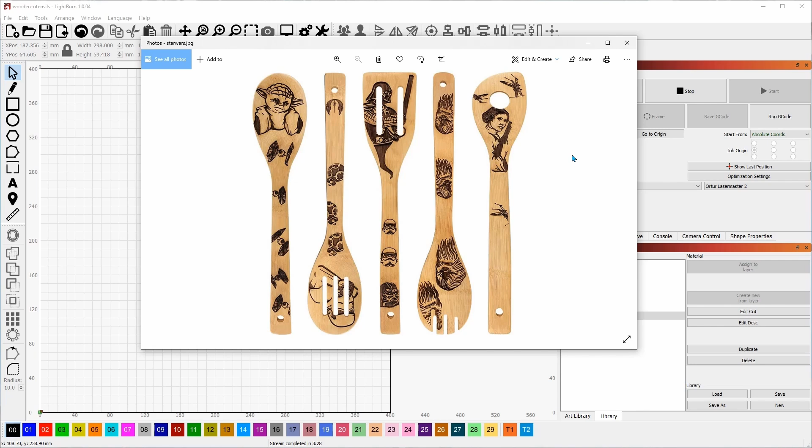So today I'm going to show you how to frame this out so you can get everything perfect, because on my first couple I didn't get it perfect. But this time I'm going to make it perfect, and the end product is going to go out to one of my Patreon supporters, Stuart, and I am making this for his daughter, Tara. So let's get started.

I did some basic measurements of the spoon and the other utensils, and it's 298 millimeters from one end to the other. So I'm going to start with this rectangle, put it onto a tool path, unlock it, and make sure you're in millimeters. So I'm going to put the width at 298.

I know the height is between 20 and 25 — it's 20 up here where it gets a little narrower, and 25 back here. So I'm going to choose a happy medium and put it at 22. And there we go, that's our workpiece right there.

Now, to make this into a spoon, we also need to add the spoon end. I measured the spoon end, the oval part, and it's 100 by 60. So I'm just going to bring out an oval, drag it out in any shape, doesn't matter. It's 100, I press tab, by 60, press enter, and there's our spoon part.

The entire spoon part is engravable, but I'd rather engrave on the inside part. So I took a measurement of where it dips down, and I came up with 80 by 50. I'm going to select this one, press Control+D to duplicate it, and change it to 80, press tab, and 50, press enter.

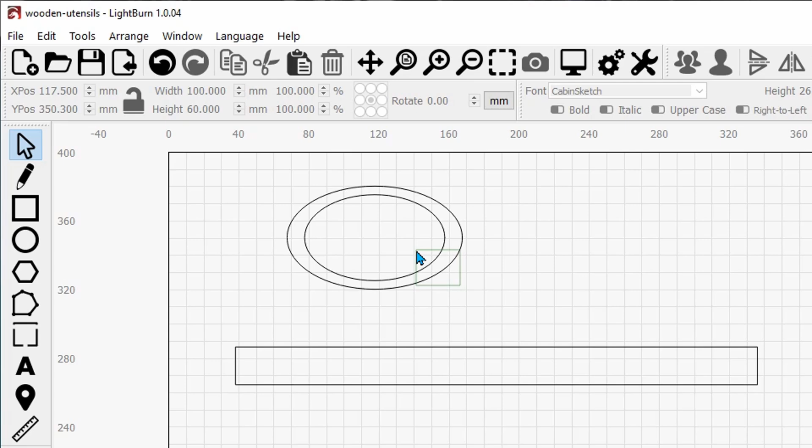Now I have my two ovals, and I'm going to drag from the bottom right so that I have a green drag — see the green color? That selects both of them. If I drag from the top left, it doesn't select anything unless the whole thing is encompassed — you see it'll only select that one. So you have to cover everything to select it. Dragging from the bottom right, or actually anywhere from the right, will select both of them.

So now I've got these two selected, and I'm going to drag this over here. I'm going to zoom in. I'm moving my work plane by pressing down on the center mouse button and dragging, or you can come up to the top and click the drag button and then click with your left mouse. To zoom in, I'm rolling in on my roller wheel.

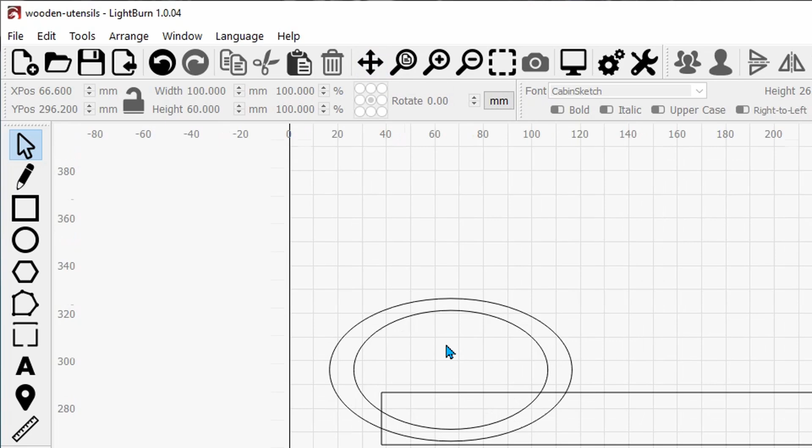Now I'm going to select this again, and I'm going to bring this down and get it right to where the edges are, just like that. Now you see it's almost touching both edges, so I want to have it right at the edge of both, and that's close enough. So now we've got what looks like almost our spoon here.

At this point, I'm going to click on the outer circle, hold down shift, click on the rectangle, and weld those two together — this is the weld button right here. Sorry, I went quick, let me back that up and show you again. I click on the outer circle, click on the rectangle, and come over here to weld. And there we have something that's looking like our spoon.

Now there's a spot I want to mark on here, which is the little circle cutout for the hanger. I know that little circle cutout is exactly 7 millimeters.

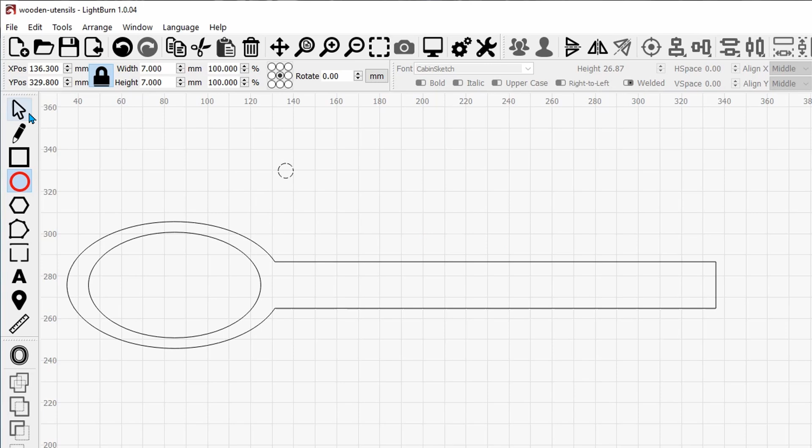So I measured that, and now I'm going to come over to the circle tool, click on it, press shift, and draw out a perfect circle. Come up to the lock button, lock it, and set it at 7 millimeters. That's exactly the size of the little cutout over here. Now I'll bring that down and set it in place.

I'll zoom in so that I can see it really well, and align these horizontal centers. Now I know it's perfectly centered.

I also took a measurement from the edge to the center of the hole, and that turned out to be 18 millimeters. So now I'm going to take the line tool, click once. Now I have my line, and that's 10, 15, that's about 18 right there. I'll click there, then right click to get rid of it.

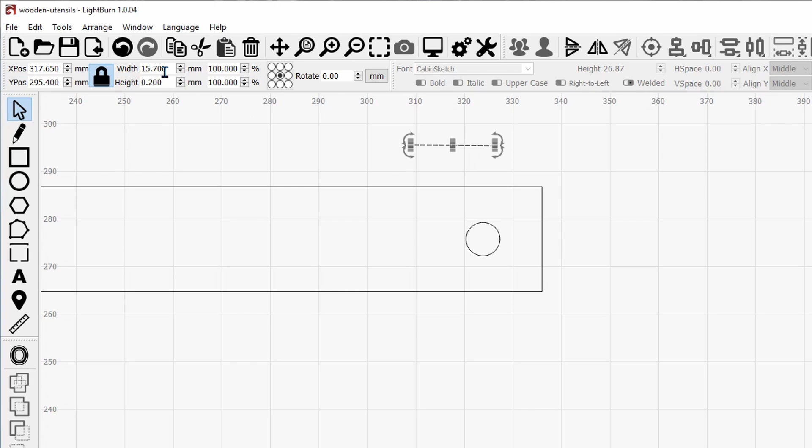Come back to the selector tool, select it, or you could press the escape key. I know that I need to be at 18 millimeters, so I'll click in here on the width and change that to 18, and that's exactly how far from the edge it is.

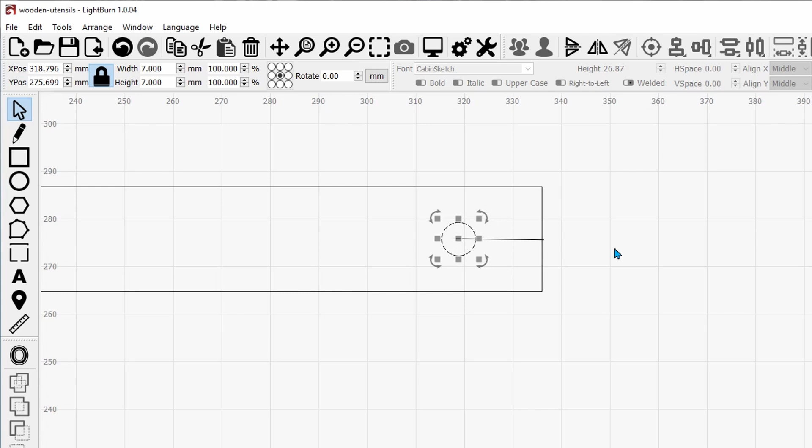With it selected, I'm going to bring it right here, and I know now that the little dot in the middle is the exact center. So I'm going to hold control and use my left arrow, just moving it ever so slightly until I have it directly centered with this line.

Now I can select the line and delete it because I don't need that anymore. And there we go, we have our tool.

Now I guess you guys can figure all this out from here on out, you know, dropping a couple graphics in, but I'm going to show you a couple little tricks. So we're just going to drag and select everything, and drop that onto a tool path down here on the bottom right, T1 or T2, whichever one you like.

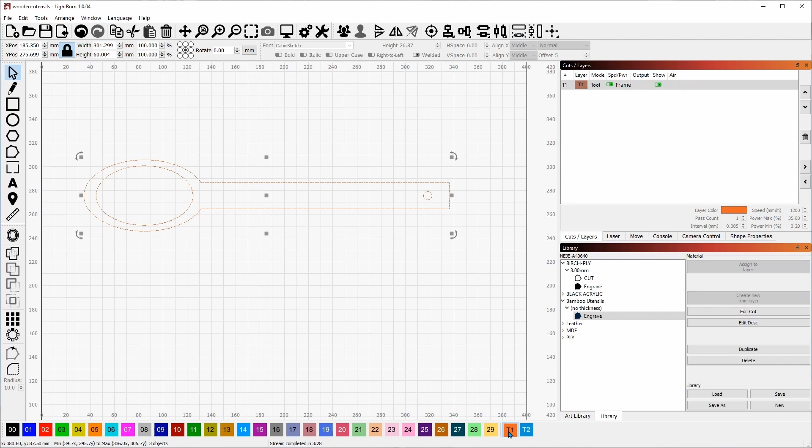Now that we have that on a tool path, we know that our rectangle is 298. So I'm going to draw another rectangle, and I'm going to unlock this up here, and I'm just going to make this one about 100. We know that the height, we said 22 was going to be the average. So that's, there we go.

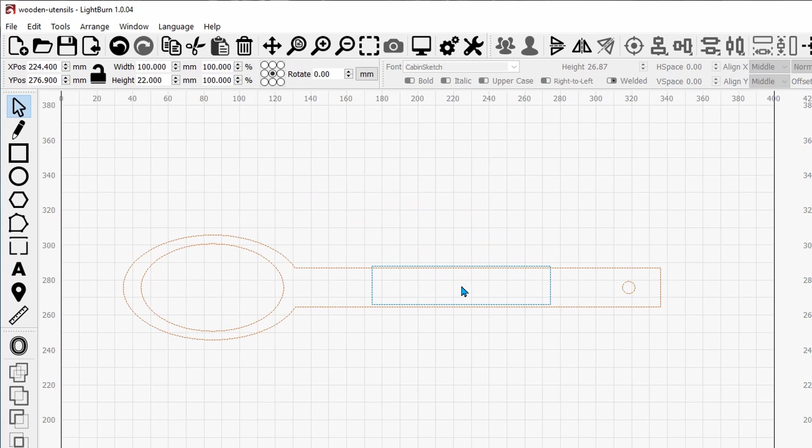Now I'm going to use this one, I'm going to put it on the T2 path just so it's a different color. I'm going to use this one to align all of my artwork. I know I don't want to go more than about halfway out because it starts getting narrower and narrower.

It comes all the way down to 20 millimeters, so it goes from 20 here to 25 there. And this is about the right spot where I need to be.

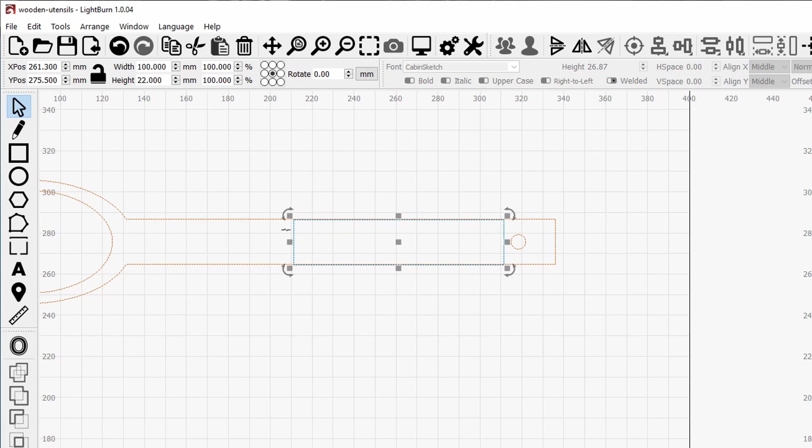Now you don't need to make a rectangle, you can just draw a line right here, same thing, but I like to have that as my working area. Just to make sure it's aligned perfectly, I'll get it right where I think is the right spot, which right there is pretty good. That's close enough, so we've got our spoon and we're ready to go.

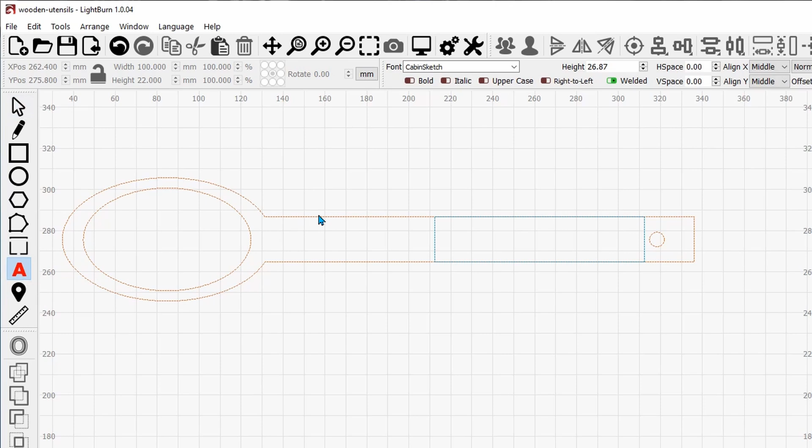Now the next thing I need to do is put in a name. I'm going to come over to the text tool, click on that, and type, actually capital, like so. I have this in Cabin Sketch.

I happen to like this font on Bamboo because it comes out looking really superb. So I'm going to put 'Tara' and let that snap in somewhere here, right there.

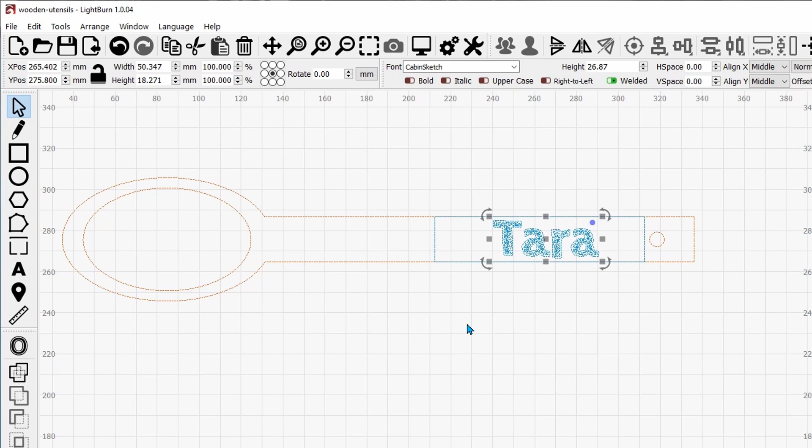Once it snaps into the middle, I'm just going to slowly move it by pressing control and the arrow key to where I want it, which is closer to that little cutout right there. And that's perfect.

Now the next thing I'm going to do is come to my art library, and I'll have links to all these files if you want to download them for free, and you can make your own using either my template—I'll put a link to the entire template—or just the art libraries. The art libraries are all available on my forums.

So what I'm going to do now is zoom out a little bit, bring in the cats, 3 cats. He said that she likes cats.

I'm going to come up to the top and ungroup these, and then I'm only going to select this one cat right here, and drag him up. I didn't get them all, see that? So I'm just going to hold down shift and grab that extra piece right there, move him out of the way, and just get rid of these 2 guys.

Now I'm going to drag over this and group it back together again. I'm going to rotate it by coming up here to rotate 90 degrees, and then I'm going to scale it down. I want the height to be around 19, but I'll say 18 millimeters to be safe. And I forgot to lock it first. Look at that - we have to lock it and then do the 18 millimeters. I do all this stuff live, so you get to see the mistakes. Now we're going to take this and drop it right there, and it snapped right into the middle. Keep in mind, this is a tool path, so it's not going to burn at all.

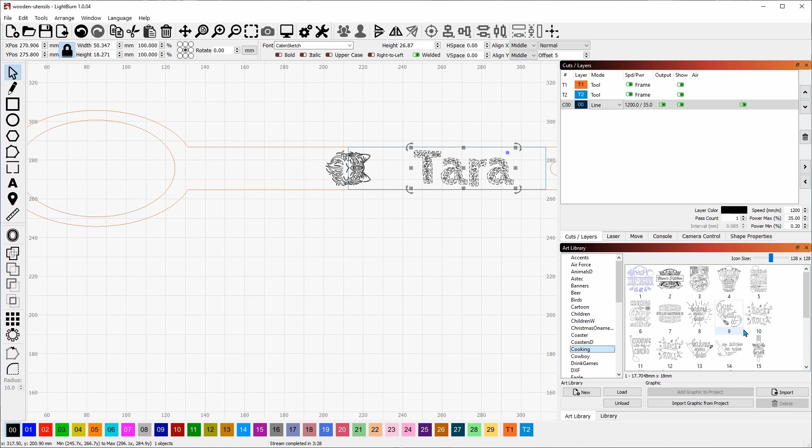So now we've got our cat, we've got our Tara. The Tara we're going to put on the black layer, the cat is already on the black layer. I'm going to bring out one more graphic, coming down here in my art library to cooking, and I think I'll bring out Top Chef. It goes on the black layer down on the bottom left. Scale it up just a bit, and we're going to rotate this also 90 degrees so that it all matches. I'm going to drag this over, let it snap into the middle. Now this inside part is where it gets lower, so I'm going to scale it to that entire size of the inside piece.

Now what I'm going to do is put this black layer on offset fill. I could put it on regular fill - if I do that and come up to the preview, you'll see we have 21 minutes and 59 seconds. If I change it to offset fill, the time gets chopped more than in half. Not only that, but the offset fill goes around in a circle, so the time is less because you lose all the white space scanning. It also does a really nice job - there's not so much movement, in fact there's no movement of the gantry because it's just going in a complete circle on all three graphics. So we've cut our time probably by about 60%, it looks like.

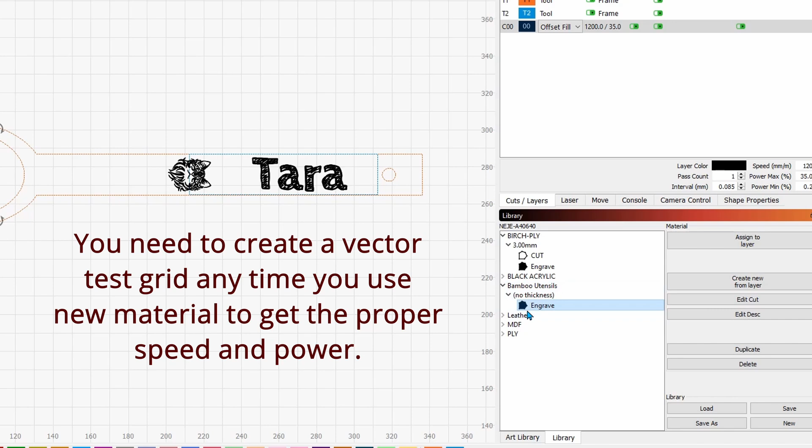Now, one thing you do need to do is some testing on your laser to find out what speed and power you can burn bamboo at. I'm not worried about that because I have bamboo in my cut library - I've already done my tests. This is my engrave right here. All I have to do is assign it to that layer. It's exactly the same as what I just did because I already knew what the settings were. So there we have it, that's the first one.

So now comes the trick. The black layer we're going to turn off, and now that we have this all set, this blue tool path here is the one we want to frame with. So what I'm going to do is stretch this blue tool path out right up to the edge here, and then on this side, stretch it to the edge here.

And I'm going to turn off the framing for the orange one. Now the only thing that's going to frame - and actually we don't even need to show that at this point, I'll just turn it off for a second - the only thing we need to frame, the most important key part, is going to be from here to here, around like this. This is going to be our key framing spot right here.

And I think this is where a lot of people mess up - they try to frame the entire workpiece and it doesn't work out well. So if we just frame this spot right here, it'll frame all the way around to here, and then I'll know where the edge is on this side to have the edge of the spoon. Then it'll come all the way back, and I can make sure from here to here to here that it's perfectly lined up, and we'll have a perfect frame. That's a neat little trick for framing this odd shape.

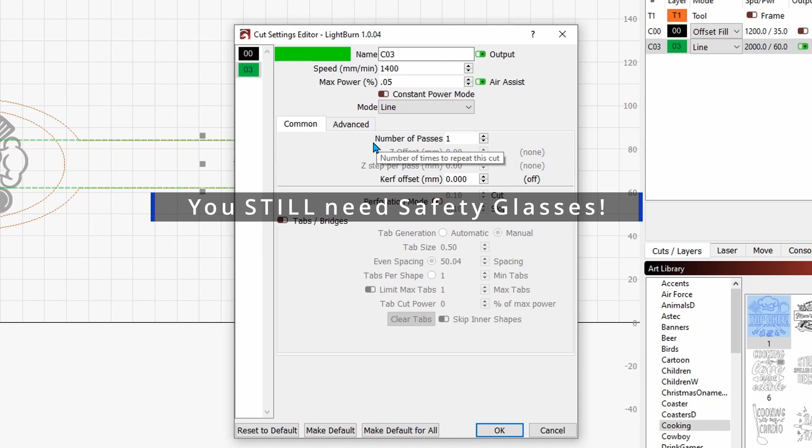And here's the trick: set the power to 0.05. That way it just turns on the laser so you can see it. Now we're going to change the number of passes to 3. With 3 passes, it's going to go around 3 times. It's not going to do anything else right now except this green framing.

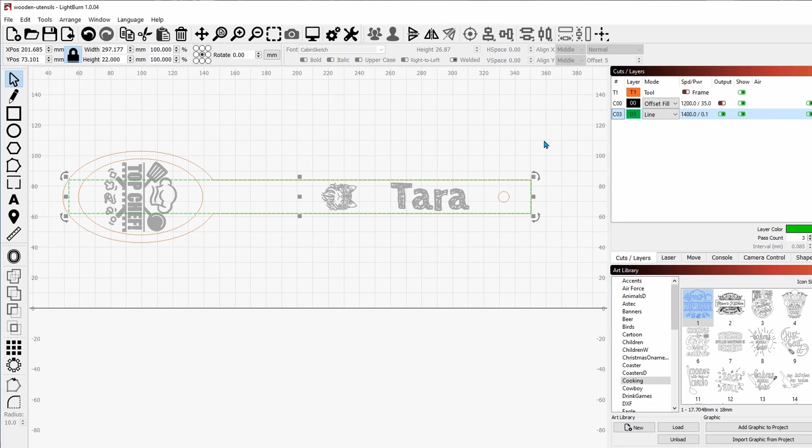This is how you're going to get a perfect engraving on this utensil, by framing it properly. I'm going to go videotape the framing separately and show you how that went. Alright, so here we go with the framing, and you'll see I'm able to move the workpiece around because it's just going to go around and around in a circle.

3, 4, 5, however many times you set it to do it. Now I did find out doing several of these that 5 is probably the best setting, because I keep knocking things around and moving things. These move so easily, they're bamboo.

But one thing I did notice is every one of them has a slightly different shape. So you can hold them all together perfectly square, and they're all cut just slightly differently. So you have to watch. I figured out where the laser drops off over on this side, or it comes back on, and where it comes on this side drops off on this side, and just try to get those two parts lined up, and of course the top corner.

And that's the only way I know to get this lined up perfectly. You'll never ever get these perfectly lined up, but you can get really close. That's the best way to do this, just to get as close as you possibly can. And trust me folks, it's going to come out better than anybody else's.

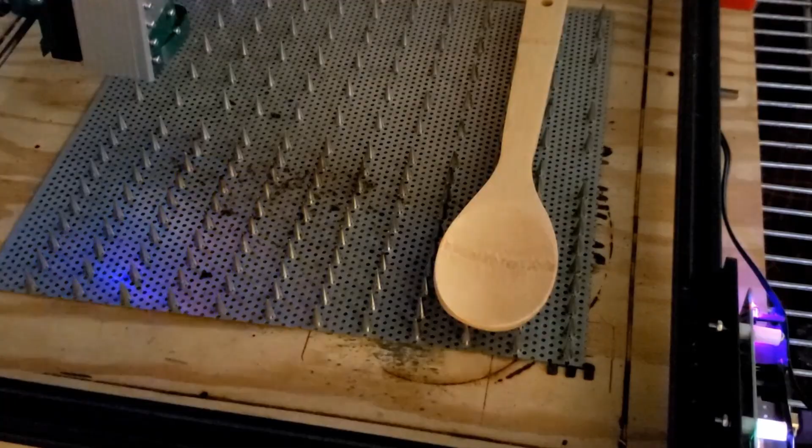Alright, so now you can see by the video the framing went pretty well, pretty easy, didn't take me long. So doing these 3 passes gave me time to maneuver the spoon on the workbed, and I got it lined up just perfectly, exactly where I want it to be. So now with this framing rectangle, I'm going to take it and grab it and move it off.

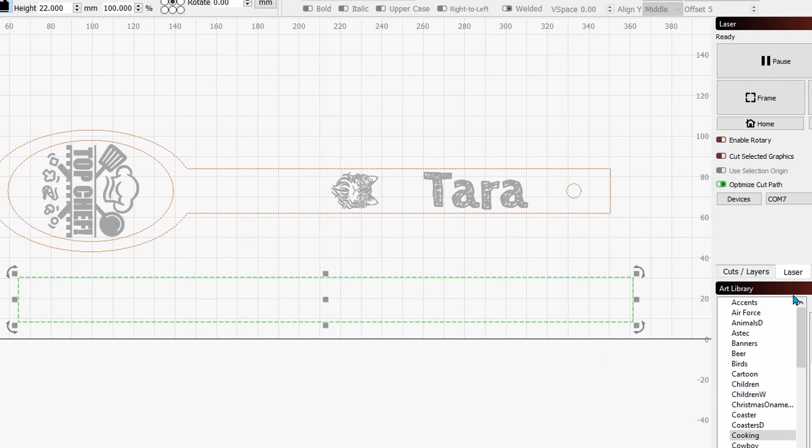I'm just going to set it back on a tool path again. I'm going to put it on the T1 layer. I'm going to turn off the framing on that one. So now the framing is off.

I'm going to come over to the Cuts and Layers tab, and I have to put these back now where I want them. So this one I want on the black layer, and I want it to output. And there we go, so now it's ready.

It's ready to burn. I think I want to move these just a little bit closer to the hole. So I'm just going to scoot these over just a hair by selecting them and pulling them back a little bit, just to make sure everything's good.

Now this one we don't have to worry about, it's not going to output because it's on a tool path. And this one we don't have to worry about either. So it's just these three that we're going to be burning today. So I'm going to come over to the laser tab, I'm going to hit start, and then you'll see the actual burn itself.